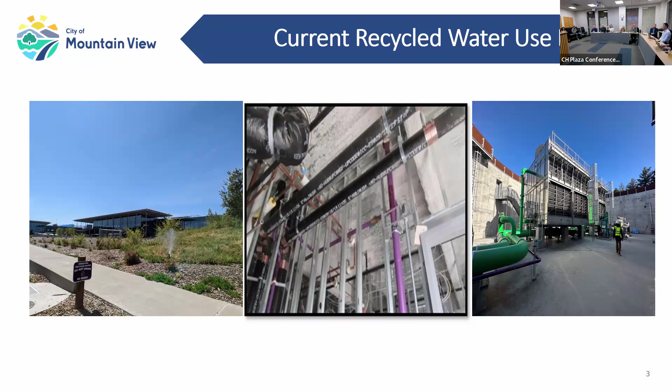To provide some background, the city owns and operates a recycled water distribution system in North Bayshore, which is an integral component of the city's water supply portfolio. Recycled water is a drought-proof water source and is commonly used for landscape irrigation, toilet flushing, and cooling towers. Here are some examples that we currently have in North Bayshore. On the left is recycled water being used at Microsoft. On the far right is an image of the cooling towers used at the Gradient Canopy, otherwise known as Charleston East. There are buildings in North Bayshore which highlight dual plumbing, as you can see the purple pipe shown in this building.

The current recycled water system with only pipelines for distribution has issues meeting maximum day recycled water demands, the maximum amount of recycled water used in any given day. In addition, our system is subject to pressure fluctuations from the Palo Alto plant. Having a recycled water reservoir will help the city meet max day demands and stabilize pressure flows in the system by providing storage.

As a result, the recycled water feasibility study update recommended we install a recycled water reservoir and booster pump station in North Bay Shore to help serve our existing customers as well as those in the future. The reason we have brought this project to PRC is that a couple of the proposed project sites are located at existing or future park sites.

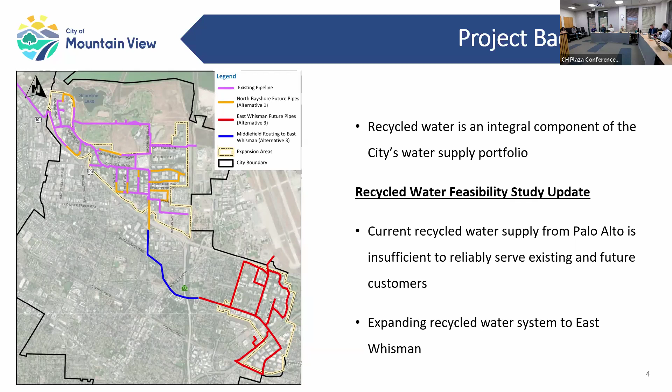From the recycled water feasibility study update, there are 3 locations identified and being included in the siting study evaluation for the construction of the future recycled water reservoir and pump station: Charleston Park (Site A), Terminal Boulevard (Site B), and the future Joaquin Neighborhood Park (Site C). Since the soil conditions were unknown initially, 3 reservoir alternatives were being evaluated at each site, including fully buried, semi-buried, and above-grade reservoir options.

After soil analysis confirmed that implementing the buried and semi-buried options were viable, staff ruled out the above-grade options as they were deemed too visually obtrusive. At the Terminal Boulevard site, the above-grade and semi-buried option would heavily impact the current roadway circulation and direct access to Shoreline Park, so it was also removed from consideration.

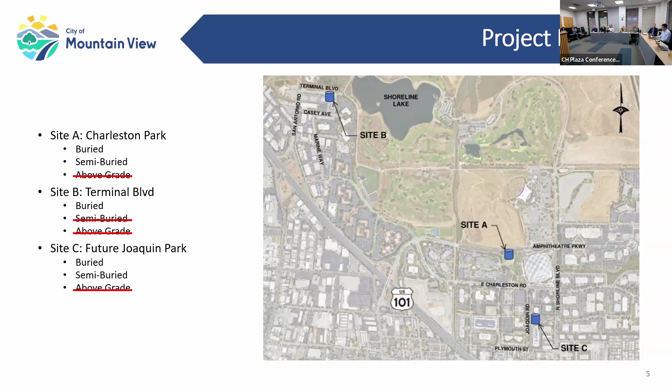Now I'm going to talk through each site, starting with Charleston Park. Charleston Park is situated between Amphitheater Parkway and Charleston Road, between the Google Gradient Canopy and Google headquarters. At this site, the fully buried option would be located underneath the existing water feature, while the half-buried option would be tucked into the existing hillside. Both options would remove the existing water fountain footprint, including all hardscape, and replace it with landscaping.

Additional space is required to house the pumps in a building either above grade or potentially below grade. The picture on the right shows the tank in relation to the park as a whole for reference. Again, these are just conceptual layouts.

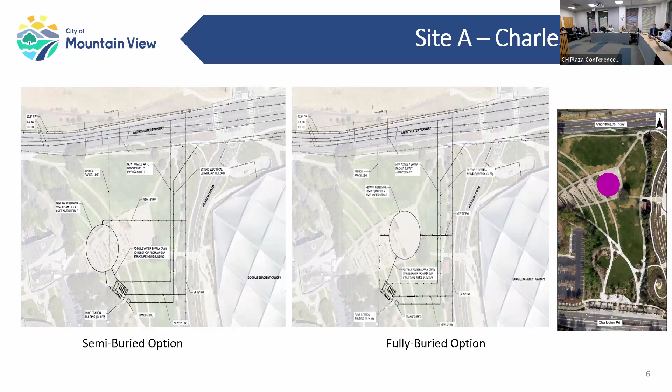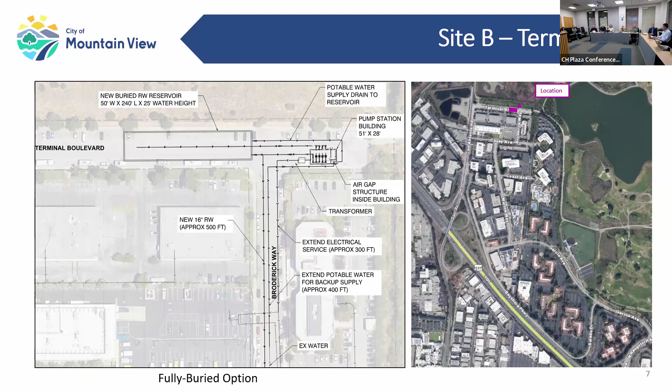Site B, Terminal Boulevard, located at the north end of the city, close to the Palo Alto border. This site is adjacent to existing commercial buildings and south of the Coast Casey forebay. The below grade option proposes a rectangular reservoir underneath the roadway, but the pump station will likely still need to be above grade. As stated previously, the above or semi-buried option was not further evaluated since the reservoir would impact access to Shoreline Park and the existing roadway network.

Site C, future Joaquin Neighborhood Park. This is the location of the future park that will be dedicated to the city as part of the Google North Bay Shore Master Plan. Since this location is not yet finalized and we're uncertain of Google's development timing in the North Bay Shore area, we are unsure of when this park may be constructed in the future. At this site, the reservoir could be either fully buried or half buried.

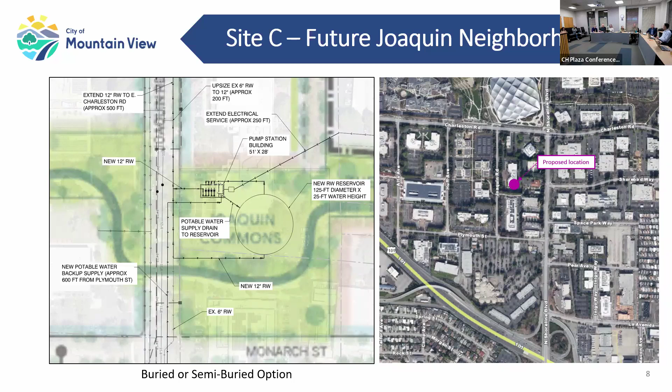We realize that these options may be a little difficult to visualize based on plan view schematic drawings, so we've included some examples on the next few slides of what some of the options might look like. Buried reservoir examples: here are 4 examples to see what the finished project might look like if it was completely buried. You might be familiar with the one in Mountain View at Graham Reservoir.

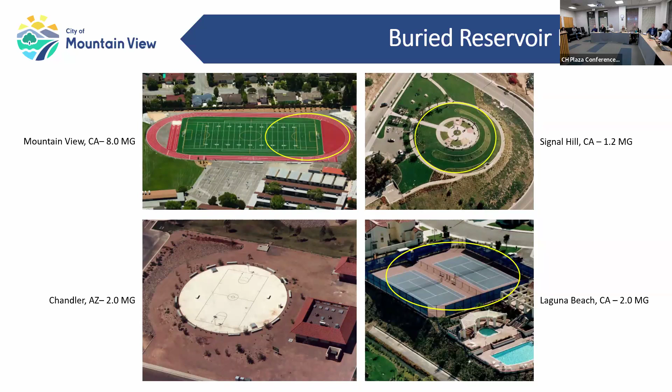We'll be able to design a buried option to incorporate park features like the examples shown here. I wanted to highlight that the reservoir we're proposing is similar in size to the Laguna Beach and Chandler exhibits here. It'll be a little over 2 million gallons, but in general, you can see how that would look.

In terms of semi-buried reservoir examples, half-buried tanks are another potential option. Blending the tank in with the new or existing landscaping, or tucking it into a hillside, are some ideas we could implement.

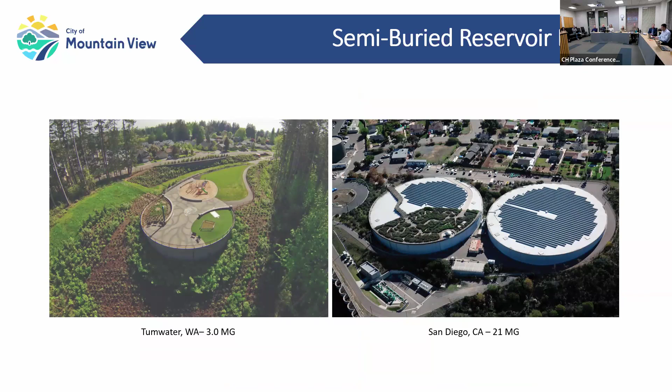In terms of evaluation criteria, it's been split into four main categories: pre-construction, construction, post-construction, and costs, with each subcategory assigned a specific score ranked 1 through 5 for each site based on specific criteria, including environmental and community impacts. For example, the constructability score for one site may score lower due to site constraints or materials and equipment. Another factor is cost, where the buried option is a bit more expensive due to additional excavation and construction required.

In terms of results, Charleston Park scored the highest. This site is located on existing city-owned property and would not require any additional land acquisition or easements. It would require the least amount of new off-site recycled water improvements to be constructed. This site would have minimal impacts to the use area of the park if we went fully buried. Staff could still consider the semi-buried option, as it would be cheaper to construct and allow us to be creative in its design by incorporating other park features similar to the examples shown previously.

For Terminal Boulevard, it really wasn't a desirable option as a buried reservoir. It would require quite a bit of utility relocation of our existing infrastructure. We have storm, sewer, and water mains located in Terminal Boulevard. We would have to extend the recycled water mains to this location since there isn't anything currently there. Any operations and maintenance concerns could create access issues for events at Shoreline Amphitheatre, for city maintenance staff, and for members of the public who frequent the trail. Additionally, it could have potentially significant environmental impacts as it's immediately adjacent to the bay.

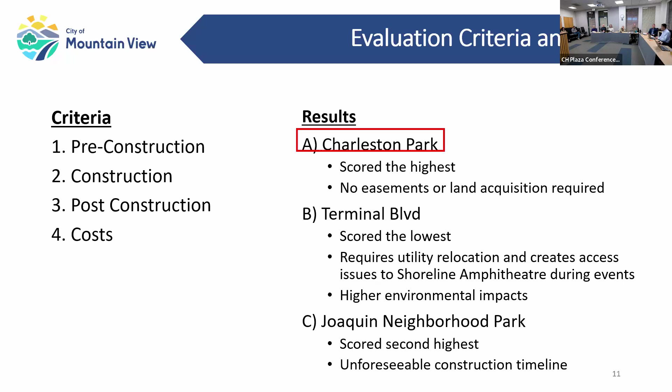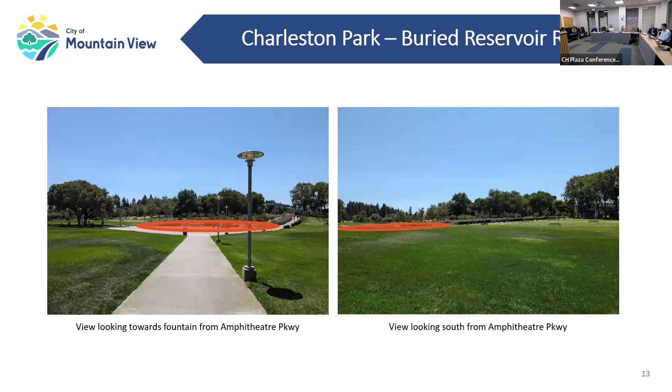And next we'll be moving on to the semi-buried reservoir option.

In summary, Charleston Park is determined to be the most feasible location for a recycled water reservoir per the draft siting study. Staff will present the study to City Council for direction on an approved location to proceed for design. Once project design begins, staff will solicit public input and present the conceptual layout plans to PRC for review and feedback, which we're currently anticipating to be within a year.

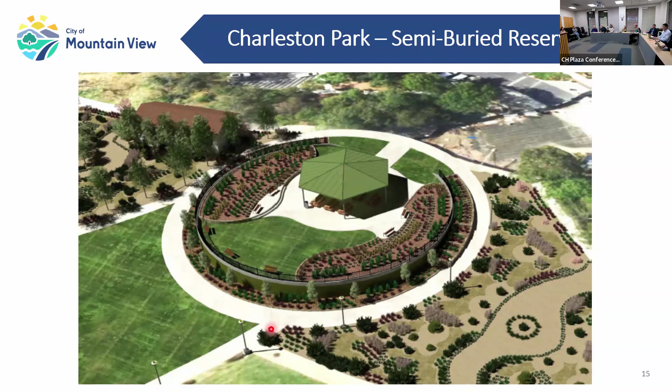Actually, we were selling our wastewater to Valley Water. They put a pause on the project. They're in negotiations with Palo Alto to build an advanced water purification project right on Terminal and San Antonio, but on the Palo Alto side, so on the west side of San Antonio, at the end of Terminal. But they put a pause on that project. They were gonna treat the wastewater from the Palo Alto plant, which we contribute to - Palo Alto and Stanford, East Palo Alto, Los Altos, all of their sewage goes to the Palo Alto plant.

So they're buying rights to our wastewater. They were gonna take it and treat it more, and then build a 20-something mile pipeline down to Campbell to recharge their groundwater. So that's what you meant by selling our water. Yeah, it was an agreement, probably 10 years ago. No, actually it was only 2019. Oh right, so it's still in contract, but right now they put a pause on the project.

And is that still considered to be a good deal? Right now, as part of that agreement, Palo Alto and Mountain View are considering another advanced water purification project to enhance the quality of our recycled water. That project is in design, and it's gonna be built at the Palo Alto plant versus the other parcel I mentioned. For that project, for the wastewater rights, Valley Water is contributing $16 million to the Mountain View Palo Alto project. Before they build it, every year they're giving us $100,000, split 50-50 between us and Palo Alto. So every year right now, for the contract's duration, we're receiving $50,000 until we build the actual treatment plant. Then when we bid out the project, they're gonna give us $16 million to pay for it.

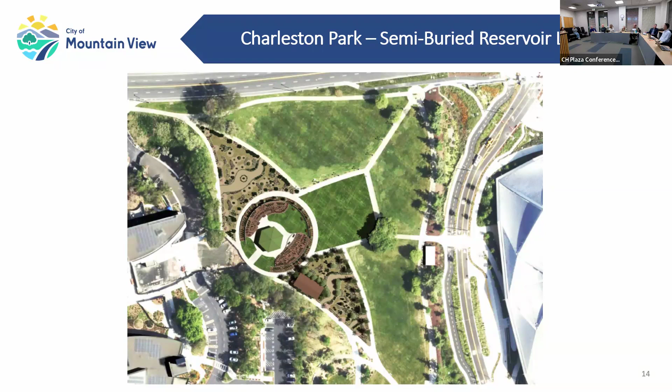All right, so I guess we can turn then to the commission to discuss and make a motion. Would anyone like to start? I can start.

So first of all, I thought it was helpful to read the full report and learn a bit about our local wastewater recycling process - that was interesting. With what I know now, I would support the Charleston site. I'm somewhat ambivalent between the fully buried and partially buried options. I'd probably have a stronger opinion between those two if we could see a more clear schematic of how that entire area would be re-landscaped under each alternative.

So if we don't decide between buried and unburied tonight, it would be interesting to see the different designs that might come back to us later. I will say I found the mezzanine look on the partially buried option to be creative - a nice way of integrating the sloping terrain, and it creates an interesting sitting area. Obviously there are lots of other ways that could go.

I don't think there's really much to say on the other options. I thought Terminal Boulevard was by far the lowest ranked based on the criteria, and Joaquin Park just isn't really viable due to the 15 to 30 year delay. So, sorry, those are my thoughts.

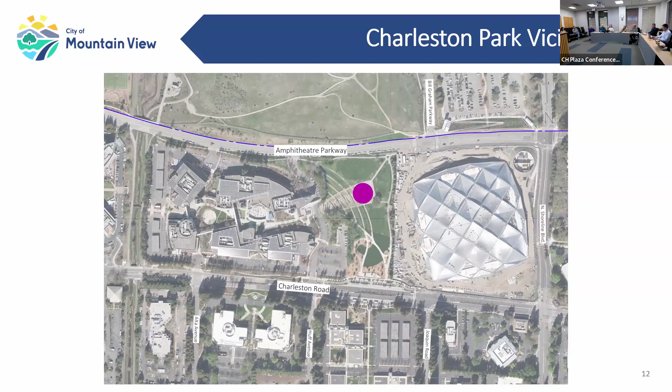As far as, I know we're just talking about the bigger picture for this park, but when we come back and do the conceptual design, I would like to see an equivalent level of amenity. In other words, when we take the fountain out, let's not just put some grass or plants back, it needs amenity, because it's currently a fairly high amenity park.

The space looks great in plan view. It's a pretty innovative design in plan view, looking down from the sky. But when you get out there, having to walk those paths, it makes it unnecessarily long, and you're going, but I want to go over there and I can't.

So I think we can definitely make improvements to both the plant palette. Actually, this northern end of the park was replanted recently, I think John mentioned, by Google. And if we could kind of incorporate that type of palette, it would be wonderful. But I would like to see some equivalent something there that we can talk about later. Rather than just plants and a canopy, I think it needs to be something that's distinctive and memorable.

It's interesting, I tried to figure out where you could park to use this, and you have to trespass. There's some open parking up on the upper side, across the amphitheater parkway. Okay, well, I parked in one of the... anyway, where I'm going with this is it's not totally obvious.